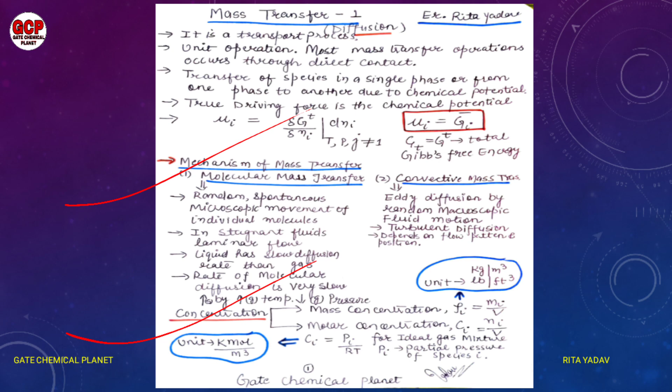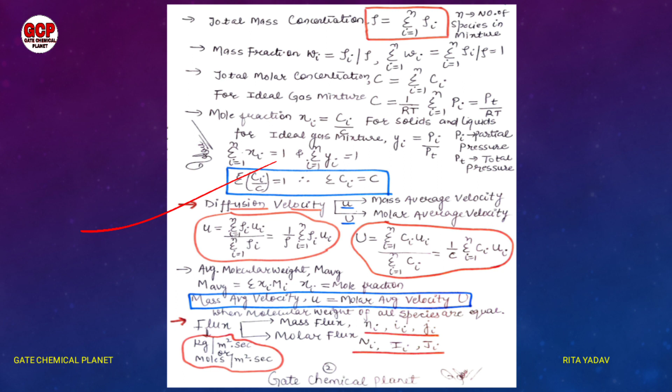Then diffusion velocities, mass average velocities, molar average velocities I added. Then I added flux here, mass flux and molar flux.

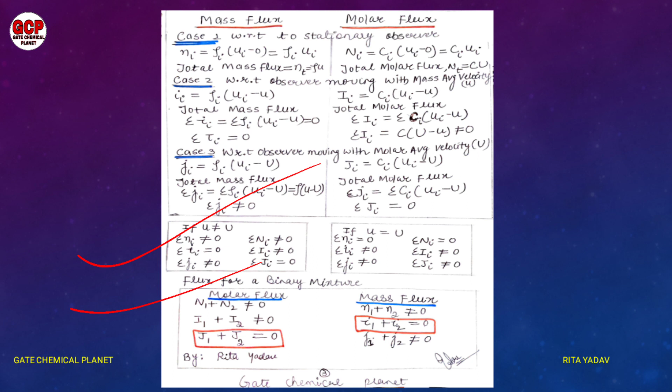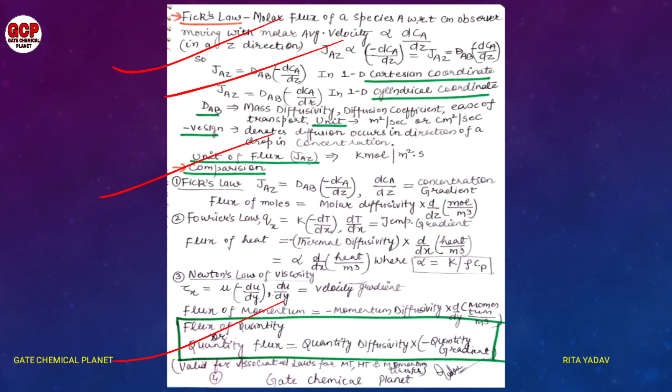...and Newton's law of viscosity. This equation is very beneficial: flux of quantity, or the quantity flux, equals the quantity diffusivity times the minus of the quantity gradient. This is a very important equation. So learn all these things from these short notes.

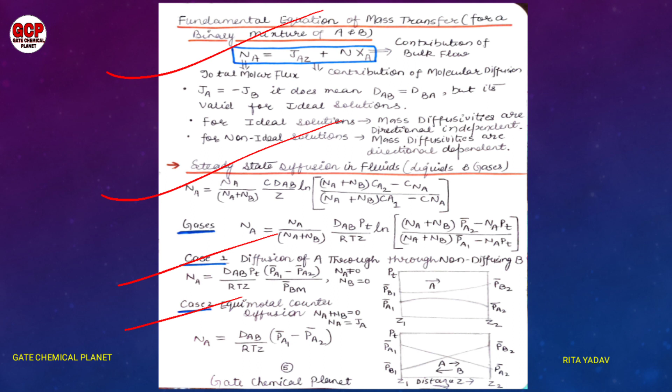Then I added the fundamental equation of mass transfer for binary mixtures and steady state diffusion in fluids, for liquids as well as for gases. For gases, I added two cases: case 1, diffusion of A through non-diffusing B, and case 2, equimolar counter diffusion. This graph is very important. Then I added diffusion for liquids, diffusion of A through non-diffusing B. Very important formulas I added here, so you can learn all these formulas from these short notes.

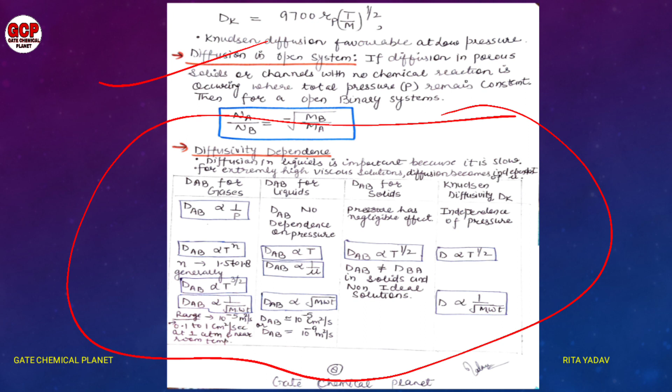I have prepared a chart here for diffusivity dependency on pressure, temperature and molecular weight for different cases, for gases, liquids and solids, and also for Knudsen diffusivity. This is very important. And then I added multi-component diffusion, very important. All these things are very important for revision for the GATE examination.

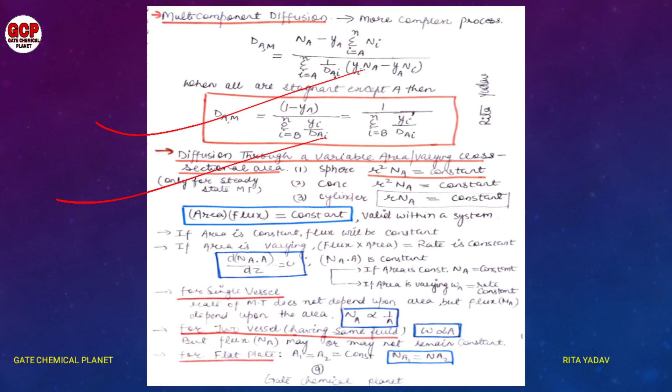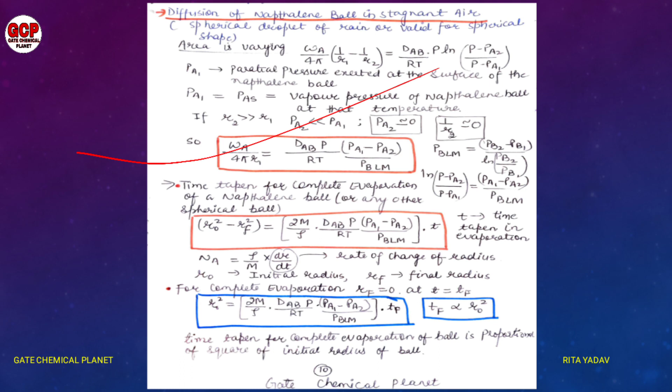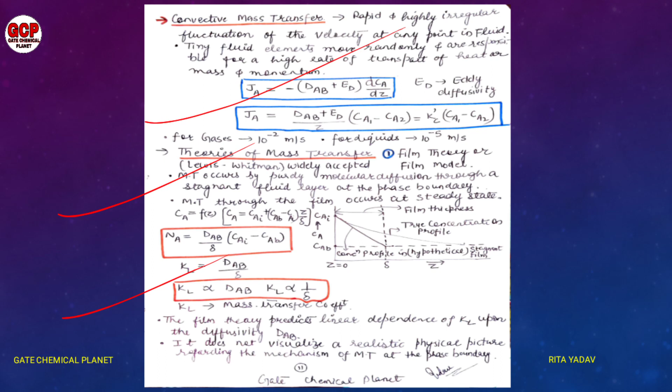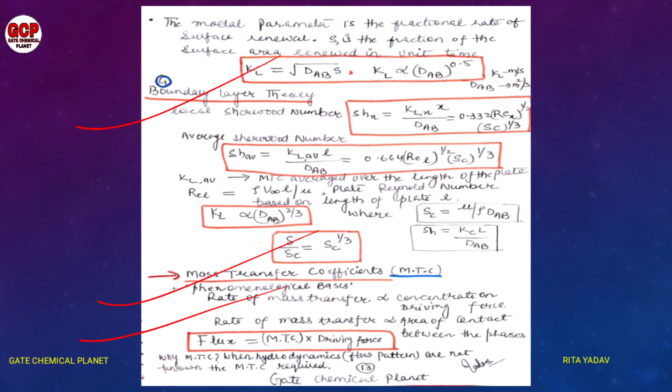Then some theories of mass transfer: film theory I added here, which is very important. Then penetration theory and the equations related to penetration theory. Then I added surface renewal theory and boundary layer theory here. This is very important. Then in my short notes I added mass transfer coefficients. What is the relation of mass transfer coefficients with flux?

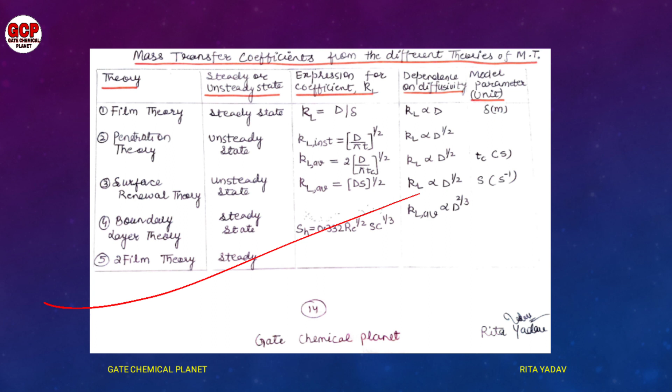I added a table here to summarize all the theories, the expressions for the coefficients and their dependency on diffusivity. This is a very important table, learn this table. Then I added different types of mass transfer coefficients in tabular form. This is very important, learn this.

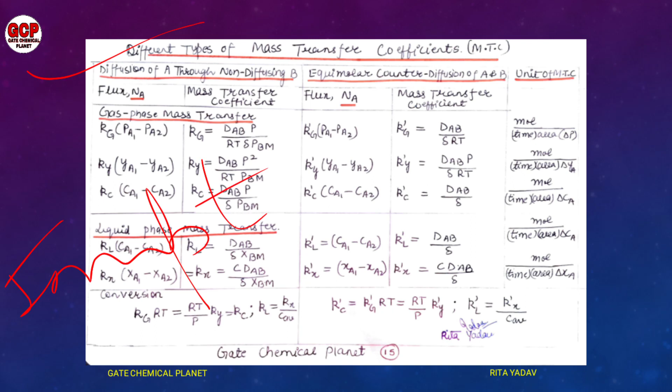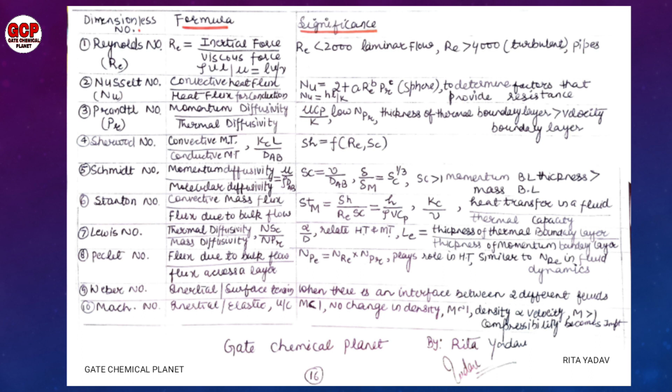Then I added the dimensionless numbers here, because dimensionless numbers are very important in mass transfer as well as in heat transfer. You can compare dimensionless numbers in both subjects. Here formulas are given and I have added the significance also. So this is very beneficial for all of you.

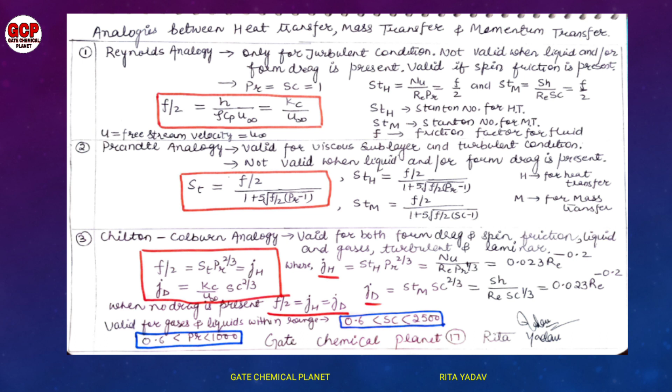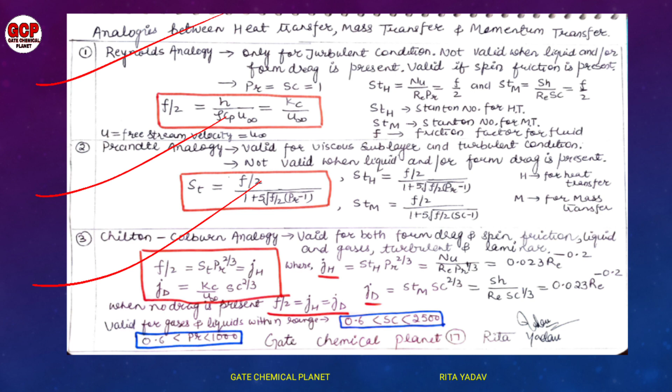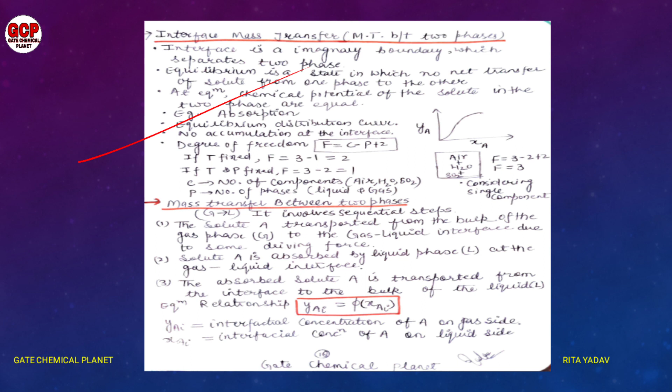Then I added the analogies between heat transfer, mass transfer and momentum transfer in tabular form: Reynolds analogy, Prandtl analogy, Chilton-Colburn analogy. All these formulas are very important for your examination. And I also added some portion of interface mass transfer, mass transfer between two phases. This is very important.

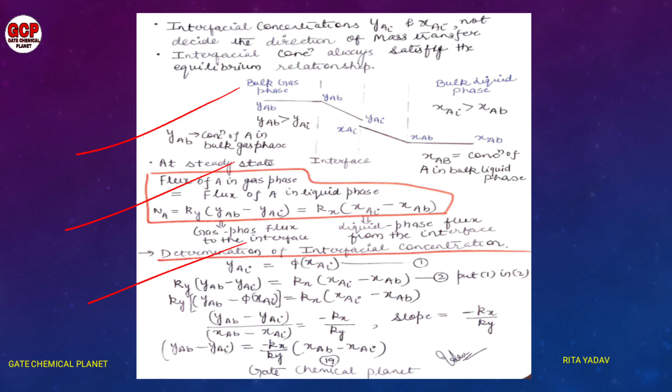So this is the introduction portion of mass transfer I added here in the form of equations. These equations are very important for your exams. And what do you mean by 1/kx?